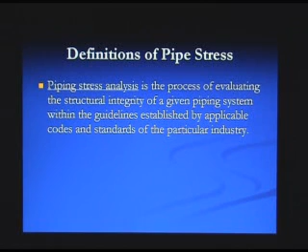What we're going to do is break that whole session into 3-4 sections, starting from, like I said, the ABCs of pipes.

Before that, I'd like to explain the definition of the pipe stress engineer. What does he do? The definition is he's a fully qualified professional with piping and pipe stress analysis experience, proficient in the utilization of piping stress engineering theories and practices. He's like a specialist. That's why you won't see in colleges classes on piping analysis, because this is a specialized field, and the only place you can really learn is working in companies who deal with this kind of business.

The person does not have to be degreed. I hate to say that because, well, we all went to school. What the heck, you know. But there are some folks who just learned by experience, working in the company as designers, or been there a while. It's just a matter of taking interest in learning and doing it. So it's not mandatory you've got to have a BS degree, but it does help now. The clients are looking more and more for degreed personnel with the PE stamp, which we didn't have before.

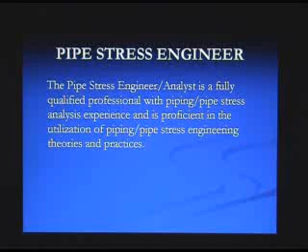Now, going back to this: what are the responsibilities of a pipe stress engineer? There are quite a few things you've got to watch for, and it sounds pretty simple, but as we go through, you'll notice.

One thing is we want to be careful that we're following all the codes, standards, and procedures applicable to your systems. And we want to make sure the forces and moments we impose on the piece of equipment or the steel structure will not damage the pipe or the structure, or mess up the equipment nozzles.

Because all those nozzles on any piece of equipment are governed by certain codes, the ASME codes, the API codes. For pumps, we've got API 610 you've got to meet. For tanks, you've got API 650. For air coolers, you have API 661. And for piping, you've got B31.3 for chemical process piping. There's a different one, more stringent, for nuclear power plants, called B31.1. So you've got to make sure what kind of system you're dealing with, so you follow that particular code.

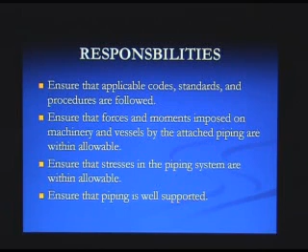And the piping is well supported. In other words, you've got a pipe going 300 feet, or maybe 1,000 feet. How do you support that pipe? How adequately are you going to support it so it's not sagging, not buckling? So you've got to keep that in mind. The pipe will stay in place after installation. Go ahead, John, go to the next one.

Okay, that's what we're talking about: controlled deflections of piping systems due to the effect of thermal expansion. That's just like the sagging. If you've got too much sag in the middle of the pipe, pipes do deflect, even though they look so stiff. It doesn't matter what size it is. If you go 30, 40 feet of span, you get a little dip in the middle between the two supports. We try to avoid that.

The stress engineers always look for that, because if you don't, the condensate in the lines could sit in there and corrode the pipes, or if it's too much sagging, it could accumulate and create a problem with slug flows under high pressure. It could push through and hit the elbows and bends, causing problems. So the deflections have to be carefully monitored.

And for thermal, you got to watch it, because if the two lines running together, one is growing quite a bit, it's going to hit the next one. So the pipes have to stay in their place as they're designed. We got to watch for the deflections.

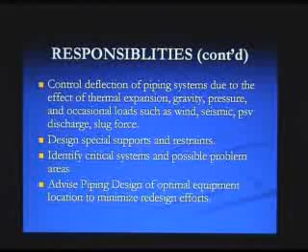The stress engineer is responsible for the special supports and restraints. We'll go later in the session and see what those special items are. Those are items which are not common and not standard. They need special attention for special purposes, so stress engineers design those supports. For any problems with the system, or to try to make it better, stress engineers work with the piping design group, whoever the designer is, so that the whole system works adequately and there won't be any problems.

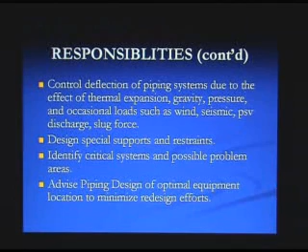Okay, now that was the part to make sure the stress engineers have everything in place. Now once you've got everything and done your work, done the stress analysis and you're happy with it, you have to transmit the loads to other disciplines. Because you're done as a stress analyst, but somebody has to physically support these pipes.

And that discipline is the structural group. So we pass on to them the loads at every location. Wherever the pipe touches anything, there's action and there's reaction. You all probably heard about action equal to reaction. So if we are imposing any force on any steel, it will see those loads.

So we tabulate and provide the structural group the information to design the steel to support it, and we pass on the loads on the equipment to the equipment group so they can check the integrity of the nozzles on the equipment. For rotating equipment, like pumps, compressors, and turbines, we give them the loads so they can make sure we are complying with the vendor requirements or the code requirements.

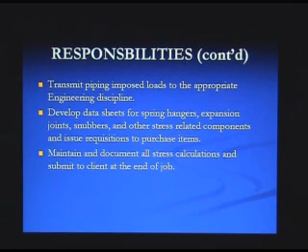Now we talked about piping systems. What is a piping system? A piping system goes from one equipment to another, all the way through. It could be one drawing or 15 drawings, but it has to be a complete system from one end to another to make it work. We cannot stress analyze small portions of it, because it has a continuous thermal effect and other effects. You've got to have a complete system.

So here we see, from the vessel column to the exchanger, we have a complete system from nozzle to nozzle there. Good.

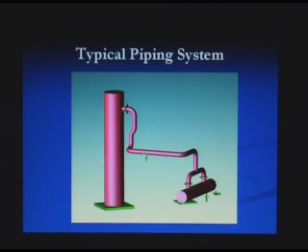Okay, this was all about pipe stress analysis, about pipe stress analyst responsibilities. But now we're going to get into piping technology. Like I was telling you at the beginning, we're going to start from the ABCs. Some of you already know, some may not, so we'll just touch a little base on that one.

The components of piping, what makes the whole piping system together, and here are some examples. On the left, we have an elbow. Elbows are used basically to make a turn. If the pipe is going straight, you don't need it, but if you want to go from left to right or right to left, you have to turn. The elbows are used to make the turns.

And then we have a T. The T is used to make branch connections. You're going with the main run, and you want to break off to another side, so we use the T's. And then we've got the reducers. Reducers, it sounds like reducing it - you're going from one size to the next. You've got a 10-inch line going, and you want to say, I need 6-inch from here on, so you put a reducer, 10 by 6, and that's the application of the reducer.

Miscellaneous fitting, just like it shows, can go 4 directions, any direction you want to go. So these are pretty common piping fittings. We call them piping fittings, and they could be all different sizes. Elbows could be the same size in and out, or it could be a reducing elbow or a reducing T. So it could be any sizes.

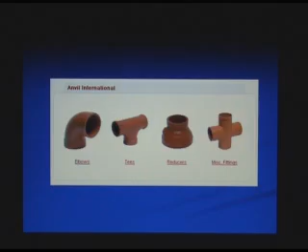So now, this is what we call the pipe. Probably everybody knows that this is the piping component. This is the main component. Pipes are used to flow fluids from one place to another, from one piece of equipment to another.

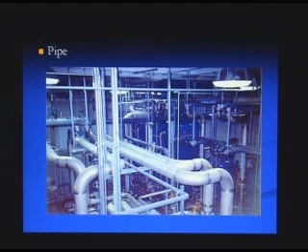So this looks like you've got the pipes, and this is how they are installed as piping systems. Here we've shown what the pipe looks like, and there is the elbow. We're talking about making a turn.

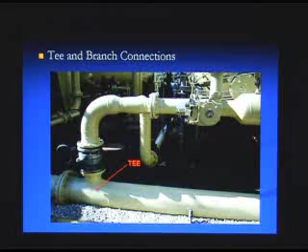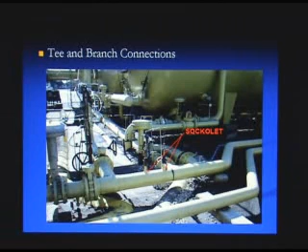T-branch, if you look here, there is a T here because this is a main header, and we're going to branch it off. This is called the T. T and branch, because this is pretty much the same thing. We've got the T here and main headers, and these are the branch connections. The main headers go from one building to another, and you want to branch off. This is what we call the branches of the main header.

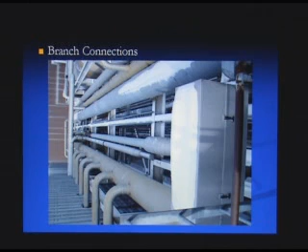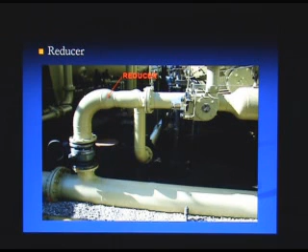So the application of a reducer, like we talked about, is right there. We are coming from a bigger size and we reduce the size here. That's the application of a reducer.

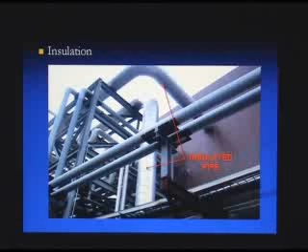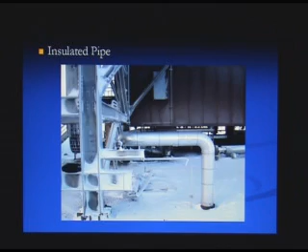This is insulated pipe, same thing here. This is at the North Slope, Prudhoe Bay, because temperatures are minus 40, minus 50. So this is how they insulate those lines. And here are some materials we use for the insulations.

The most commonly used materials are calcium silicate, mineral wool, polyurethane, and fiberglass. This is the density given here for every one of them. This comes in handy when you want to calculate the total weight of the system - we calculate the weight using the density for that material.

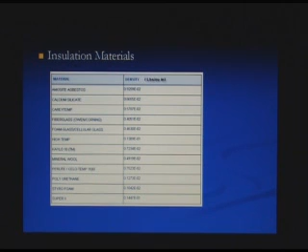So now we have another component, which is the flanges. Flanges are used to connect things - all the equipment comes with flanges. The pipe has to have its own flange so they can mate them, put the flanges together, and bolt them together. They are welded to the pipe, but they're bolted to any kind of fittings - could be a valve, could be any kind of blind, whatever. So this is how this term is used.

The flanges are on either end of the pipe, and between the flanges there's always a gasket. You probably know from other things in life that any time you're trying to connect something, it always has a gasket. So gaskets and flanges go together.

The stress engineers have to be very careful. They have to do a special stress analysis to make sure there's no leakage, because in the industry, when you're operating under high temperature and high pressure, there's a chance of leaks. So stress engineers have to make sure under those conditions there won't be any leakage at the flanges.

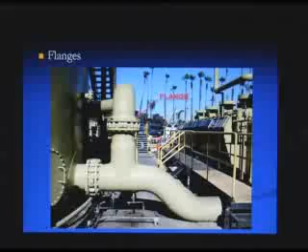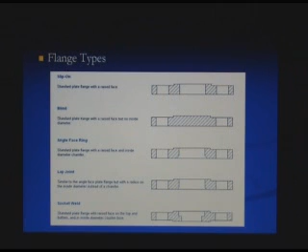So these are different kinds of flanges: slip-on, blind, angle, lap, socket weld - different types of flanges. There's some more of the same. The most common ones are the raised face flanges - these are used about 90% of the time in all piping. And the flanges have different ratings.

There are different ratings for different kinds of pressures. When you hear somebody talking about the rating on the flanges, they could be 150 pound, 300 pounds, 600, 900, 1500 - the higher the rating, the higher their capacity for pressure. They can take higher pressure and higher loads because they get thicker and thicker. And all the flanges have to be built per code too - every component in the piping system has to be qualified and manufactured per the codes.

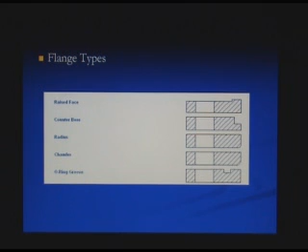And our next component, probably you all know, these are the valves. And a valve is, what is a valve? I mean, we all use it. We've got it at home at the faucets. We've got it everywhere. But in our industry, we have different kinds of valves to do different kinds of functions. So we'll just go quickly through the different names.

For the definition, a valve is a mechanical device that controls the flow of fluid and pressure within a system or a process. It just controls the flow. Okay? And what are the functions of the valve? It stops and starts the flow. It can change the direction of the flow, or you can use it to throttle or vary the fluid going through it. And they can control the flow in the pipes with the actuators.

So now you guys would think, what does that have to do with pipe stress? You are right. 50%, I would say even 80% of stress engineers don't know the functions, including myself, I didn't know either. But for the stress analyst or a stress engineer, you've got to know the weight, how much that thing weighs, because otherwise you can't do the stress analysis.

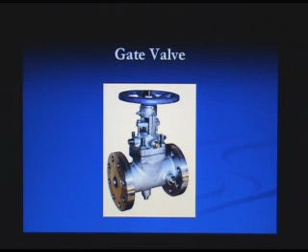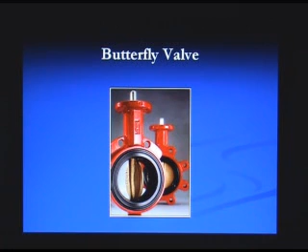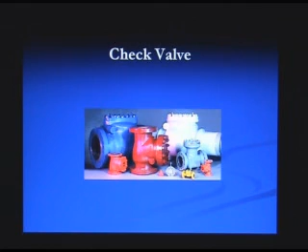So then there are different kinds of valves. There's a butterfly valve. This is the skinniest and most lightweight valve. And then we have the check valve. The check valve just tells you the fluid can go through in one direction, it can't come back. Other valves, if you leave them open, it can go back and forth, but with the check valve, the fluid can go only one direction. Another kind we have is a ball valve, a different kind, different construction.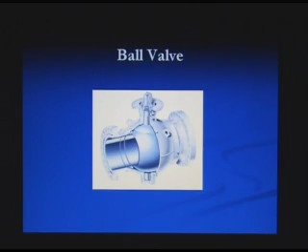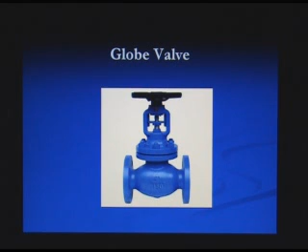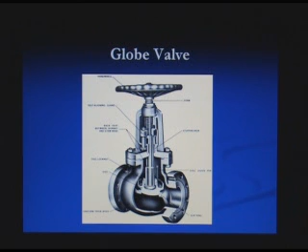The next one is a globe valve. Different mechanisms. All these valves have a different combination of functions, depending on what you're trying to achieve with the flow of the process. You want to regulate it, you want full bore, some are good for corrosive services, so just depending on what kind of system you have and what you want to achieve, you use different kinds of valves. The globe valve works the same way. Some have discs, some discs kind of plug in, some slide. The idea is to block or regulate the flow.

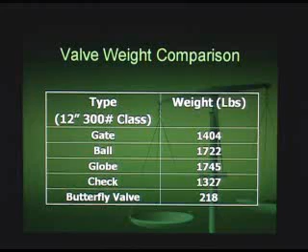Okay, so these were all the piping components. So everybody has a little bit of an idea about what makes up the piping system. All these components we went through, combined and put together, become a system. A piping system is nothing but a bunch of pipes connected with different kinds of components.

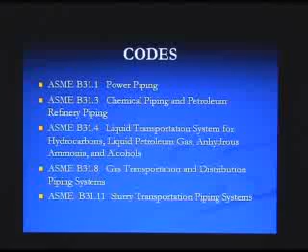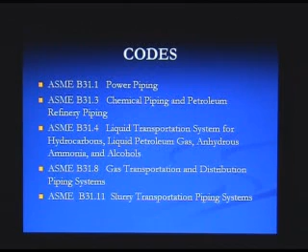Now we talked about the codes. This is very important for pipe stress analysis, which code to follow. And believe it or not, these codes are very extensive. They tell you how to design everything and stay within those limits, if you get a chance to read the code. The first one we have is B31.1. This is the power piping code, and we don't use it much here in the Worley-Parsons offices, because this is for nuclear power plants and boiler piping.